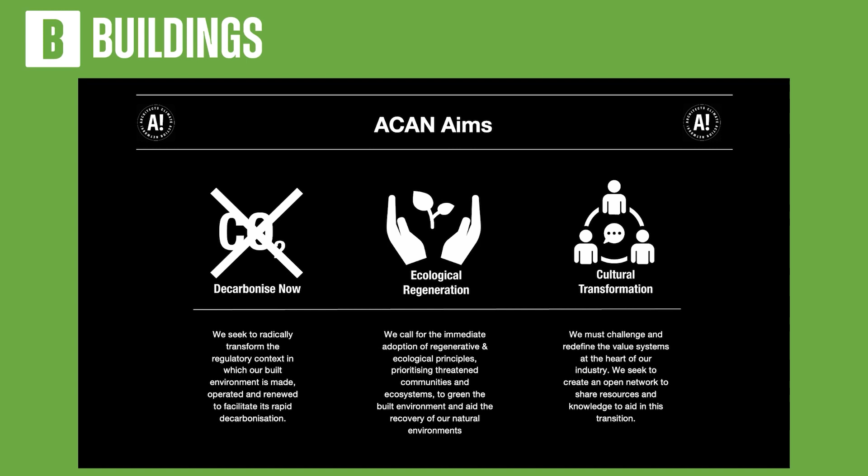Well, we've got two speakers today. Simon Sturgis is going to speak first. He's the founder of Targeting Zero, and he's a widely acknowledged expert in embodied carbon. He has advised lots of organisations, including RICS, RIBA, and the Greater London Authority.

And then we have Chris Procter, who is the director of Procter Architects, and he is the principal author of the Architects Climate Action Network Climate Emergency Conservation Area Toolkit, which he'll be talking about. So over to Chris.

Over to Simon. Wrong order. Well, you might get a more interesting slideshow if Chris went first.

Thank you. Right, this is called demolition, but I'm going to give a bit of an overview from where I've been coming from, and then I'm going to show you some case studies. So the first point I wanted to make, and there are various versions of this statistic, is that global construction is reckoned to be something like one new Greater London every 6 weeks. So that's a vast amount of construction. And apart from the resources issue, there's obviously a carbon issue.

The other point I would make, and I think this was in the blurb that was provided before this, is that about 10 to 15% of global emissions come from construction of buildings, which means that if you look at this diagram here, in terms of existential threats to humanity, construction at the moment is arguably worse than nuclear war, which is quite an out there thing possibly to suggest. But if that was to happen, it would happen in various places, whereas at the moment, carbon emissions and the impacts are everywhere. So, you know, there is a significant issue.

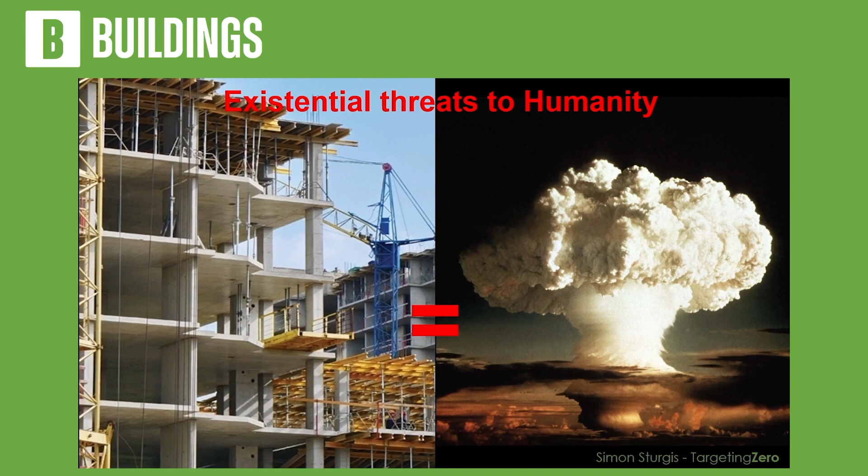So I'm quoting here Mark Carney, who used to be governor of the Bank of England, and he was also chair of the Financial Stability Board, and he said, we can't get to net zero by flipping a green switch. We need to rewire our entire economies. So this was the head money man, if you like, and he's not talking about fiddling around with BREEAM or anything like that. What he's talking about here is a major shift in how we do things.

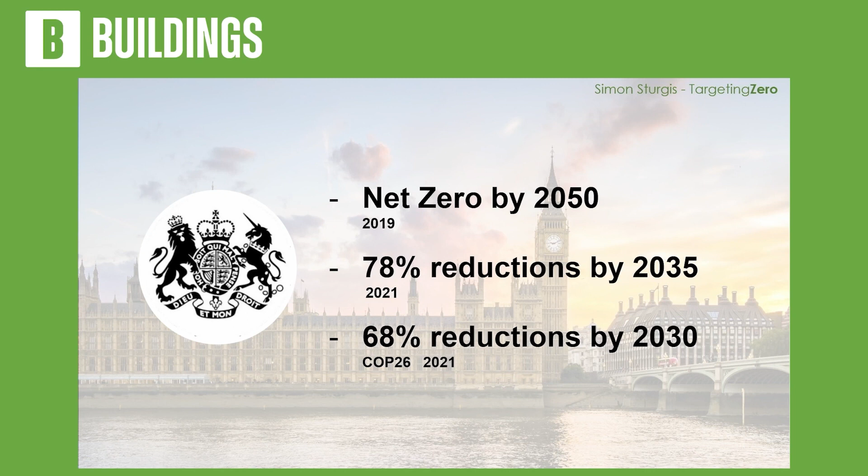What I'm showing you here is the government's current trajectory to net zero. At the top there, we've got net zero by 2050, legislation passed in 2019. And then we have 78% reductions by 2035 and 68% reductions by 2030. Now, if you put those all on a graph, that's what it looks like. So zero reductions up at the top left there, down to 100% reductions here. And the COP26 and the Act of Parliament, both in 2021, occur mysteriously absolutely on that line. So that is the trajectory we should be working to.

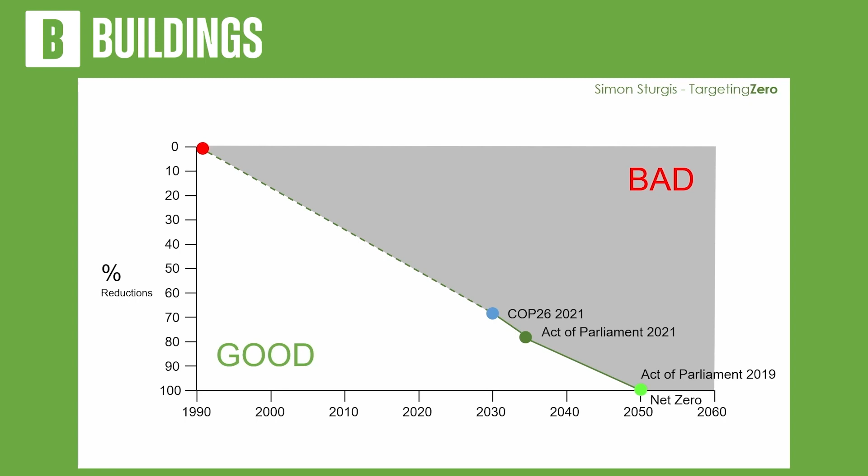And if you look at this a bit more closely, you can draw an arrow which drops down to where we are today. And what you find is that most new build happens above that line, and major retrofits and refurbishment, and of course low carbon new build, will occur below the line. The reason you've got a red bit here is because that represents a lick of paint approach to a building where you're basically throwing stuff away. You're not producing anything valuable. So that's more or less what a trajectory looks like.

And then what I put in that blue line there: if you are trying to do a cost-neutral new build, you will find that the supply chain will enable you to get down about 30-ish% without it costing your project more money. So that tends to be a limiting factor. But of course, we have to do better because we need to get down to this line. And certainly by 2025, we need to get down to something like 60% reductions in comparison to where we were in 1990.

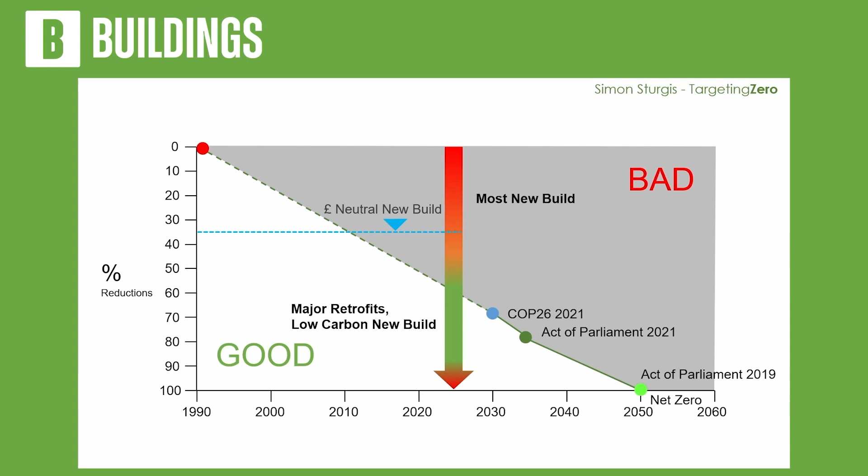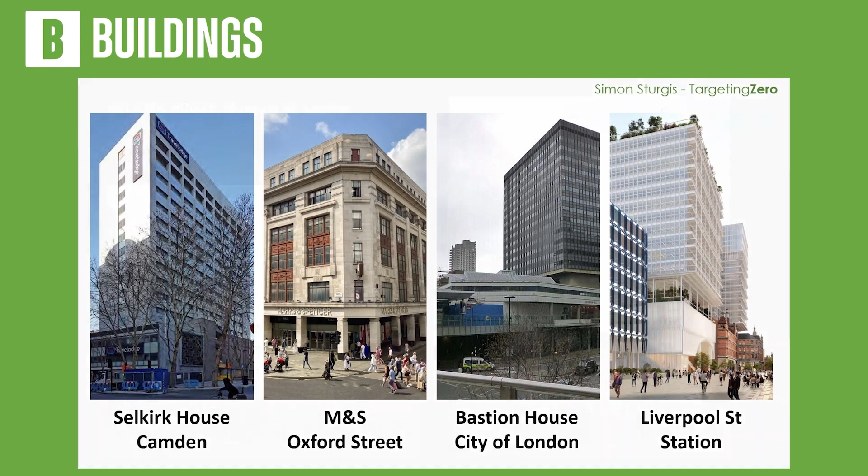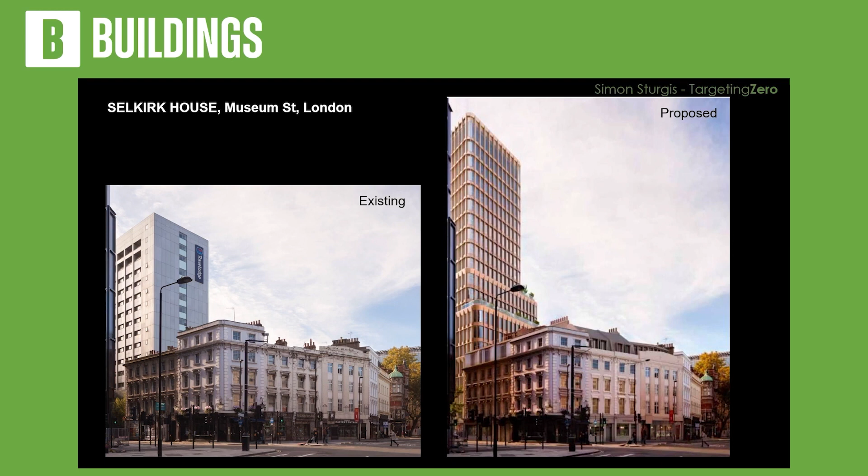So I'm just going to talk briefly about 4 different projects, all of which I've been involved with one way or the other. And the first of these is Selkirk House. And Selkirk House, on the left there, you've got the tower, which is a Travelodge and is what's there at the moment. And this scheme on the right here has now just been consented. And I'm going to say just a little bit about that.

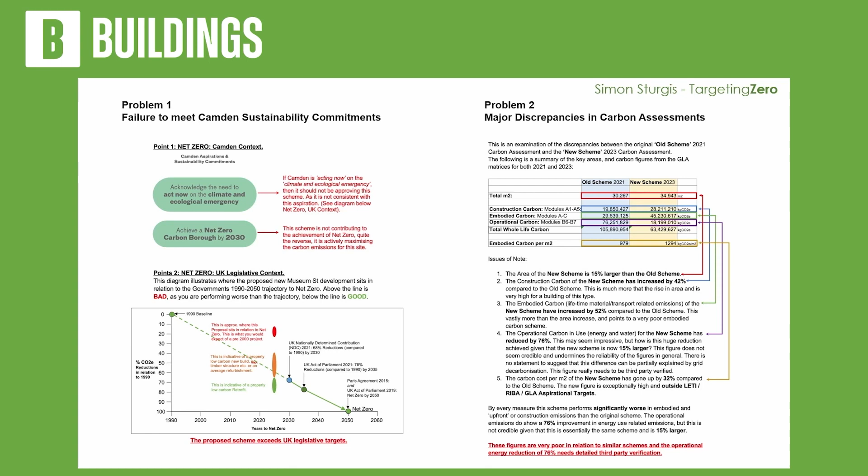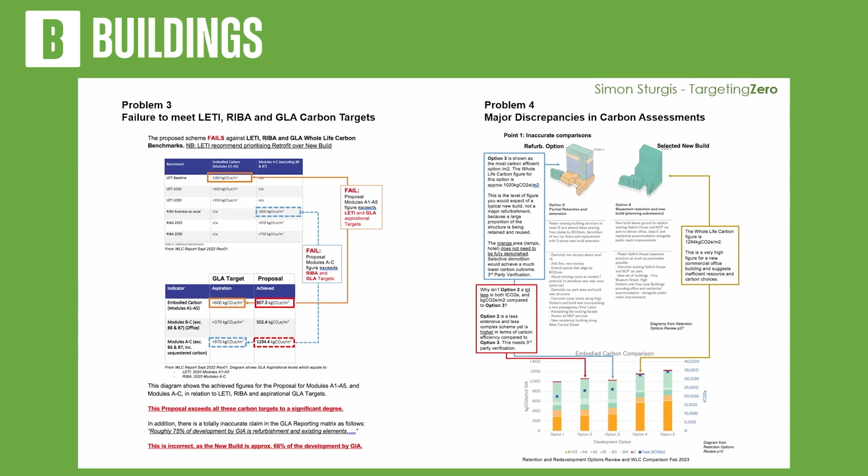There were also major discrepancies in their carbon assessments. So there were a lot of errors and mistakes, and optimism and what have you. There was also, in the submission, failure to meet all the obvious targets like LETI, RIBA, GLA, and so on. And other major discrepancies in comparing new build and retrofit. And there's other things to do with how they marked themselves, nonsense about floor-to-ceiling heights and so on, and they exaggerate all the problems.

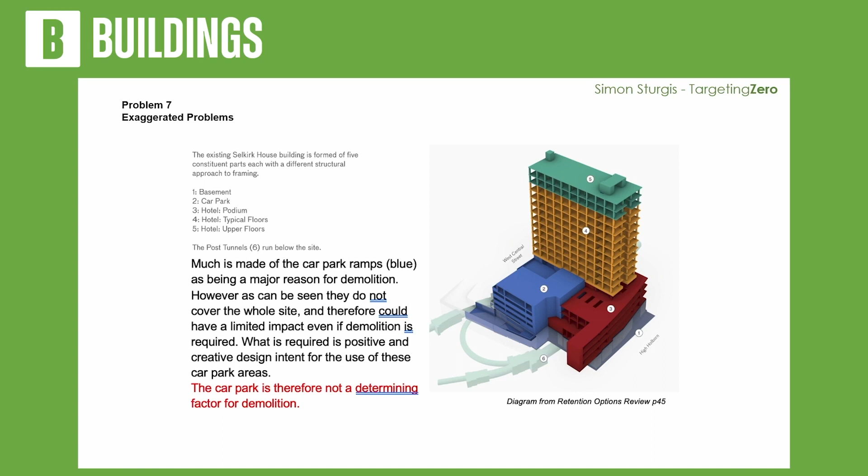And the point of all this is that Camden was so determined to approve this. What their motives were, I'm not sure, given that there is a massive excess of office space in London at the moment, and there's a massive shortage of housing. So you'd think somebody like Camden would add that up and work out that this is much better being used as residential or equivalent. But the point is that the planning system as it sits at the moment encourages you to look at retrofit, but it doesn't force it. So what happens is that people go through the motions and then say, oh, tragically, we can't make it work.

Now, we had exactly the same thing with Marks & Spencer in Oxford Street. And for those of you who've been following the news, you will know that the High Court has sent it back to the Secretary of State. So this doesn't mean at the moment that it's got consent, but it probably means that it will get consent. Actually, as it happens, we were surprised that we got as far as we did. We never thought the Secretary of State would rule in our favour initially.

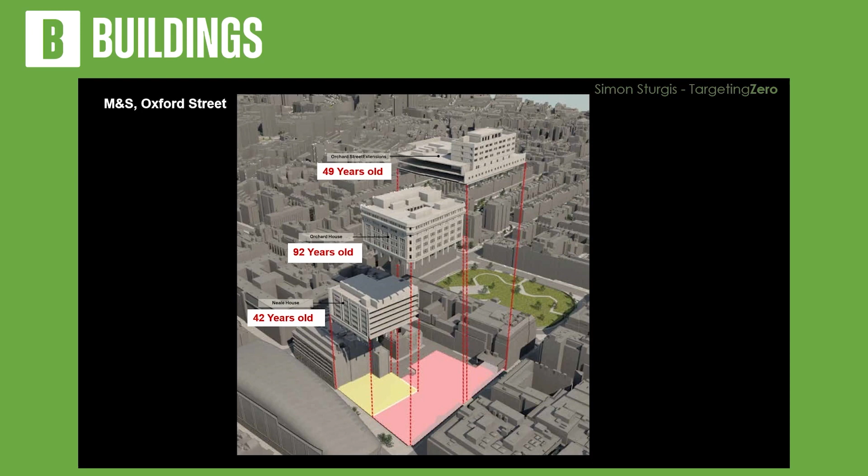But what you're talking about for the Marks & Spencer project is you've got 3 buildings. The one in the middle is the one that we're all familiar with, but the site includes one on either side, and there's a sort of low block at the back. And you'll see that 2 of these are less than 50 years old. And it seems incredible that we should be demolishing buildings of that age. And this happens on many occasions.

Now, the argument from Marks & Spencer was that they'd done 16 refurbishment studies. In fact, not one of those is actually a straightforward refurbishment. They're all, again, fiddling the books, if you like. And then they had what I'm calling here a lick of paint option, which, as I mentioned a bit earlier, was at the bottom of that arrow. So the lick of paint option is fundamentally inefficient. And what they did was they compared the lick of paint option with the new build. And of course, that quite clearly showed that a new build was great.

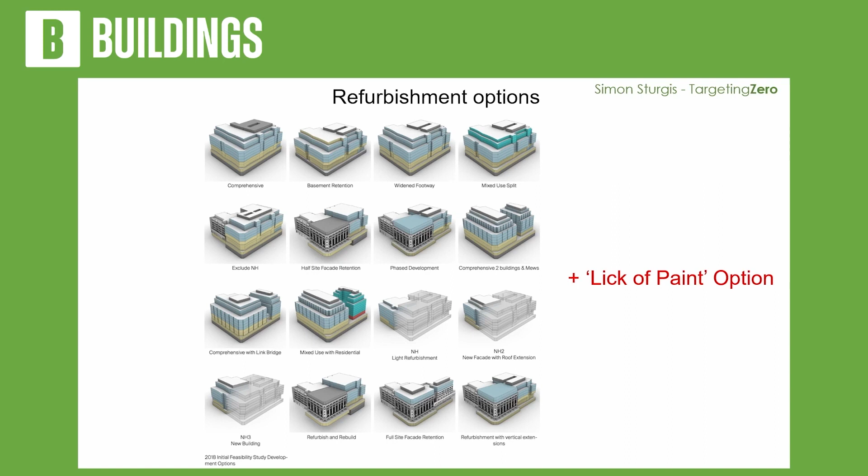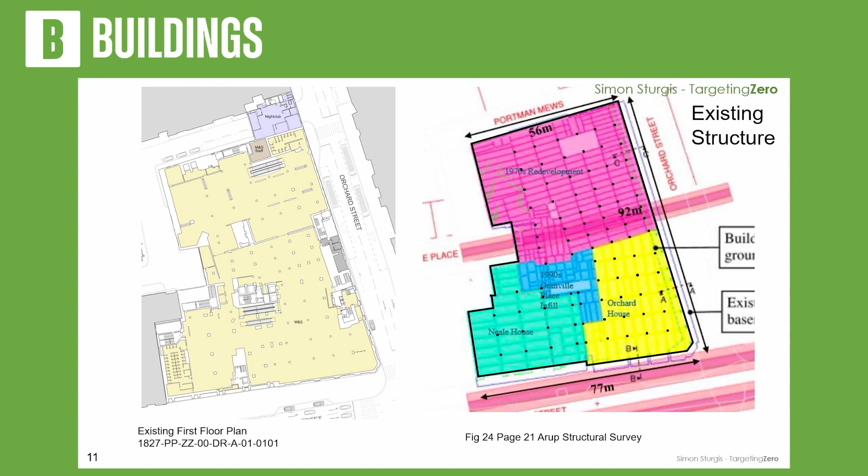The other thing that was interesting was that if you go inside the existing Marks & Spencer shop, it's chaotic in there. And you think, this is hopeless. Any agent would think it was hopeless. But actually, underneath it all is a very straightforward structure. And this is from Arup's structural survey. So underneath all this mayhem is a very simple thing. And if you stripped all that out you'd have a very clean, straightforward building that you could easily make work well.

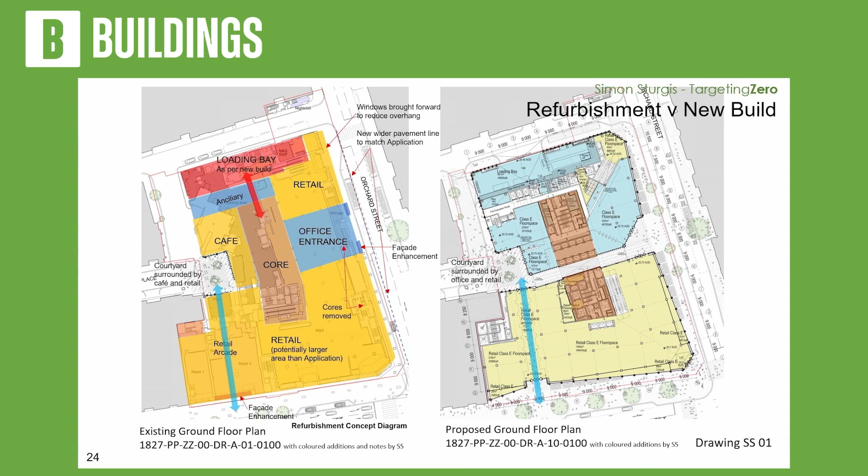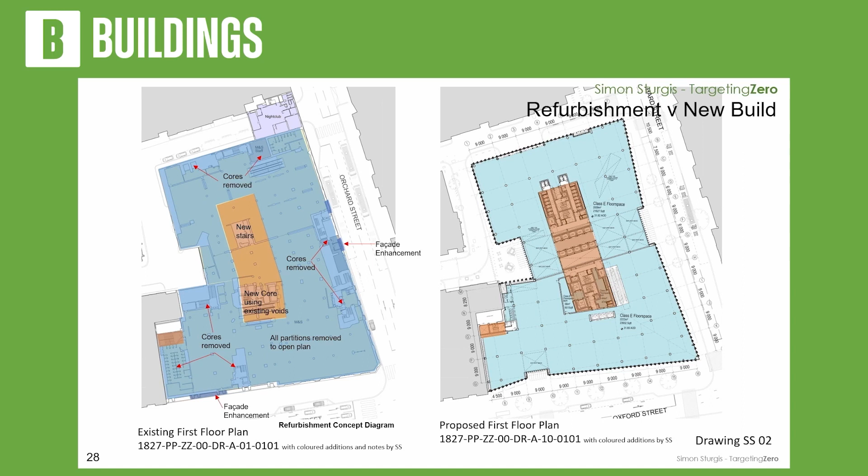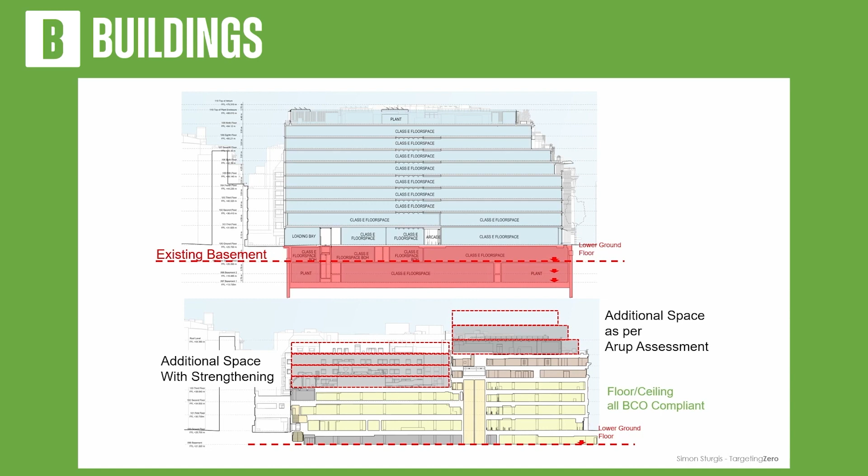So all round, the Marks and Spencer scheme was a kind of smoke and mirrors exercise, and they may well get consent for it. And I think what that means is that the National Planning Policy Framework, which determines these things, obviously needs fixing, because it does not align itself with the government's trajectory to net zero. So in other words, the government's produced this trajectory to net zero, but they haven't produced the teeth, if you like, to make it work.

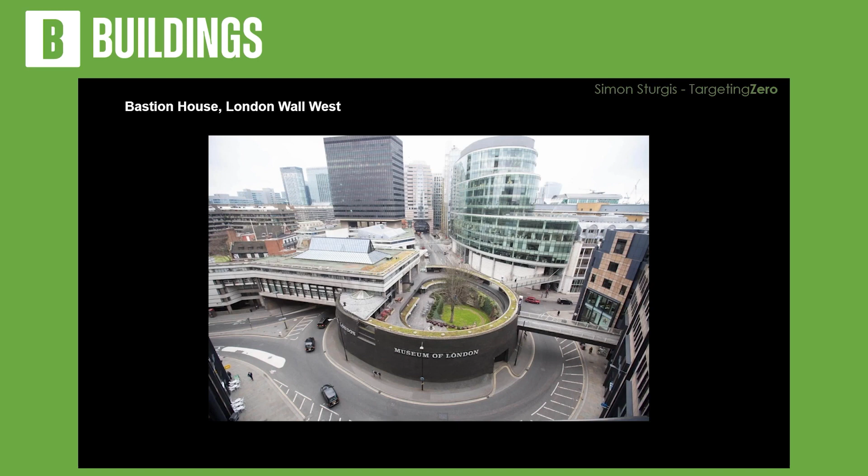So this one here is Bastion House, London Wall West, which has a similar sort of saga. I won't go through quite so much detail, but the architects looked at, as you see here, nine options. Now, the one in the red box, major refurbishment, they discounted as inefficient and hopeless. In fact, they'd done a parallel commercial exercise with developers, and they got three developers who all said they would do this scheme, the one that was discounted in the final analysis, and not only that, the developers produced the kind of money that the city was looking for.

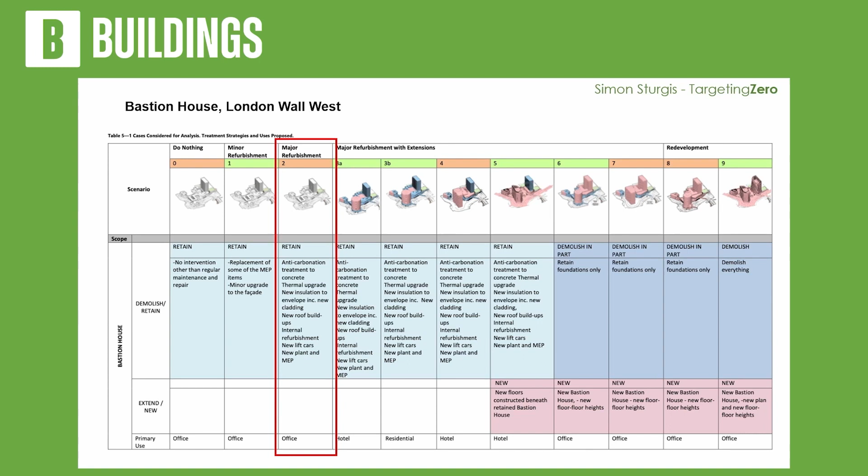So at the moment, it's going through the planning process, and I guess that if they get planning for a new build, they will discount this, because this is a poacher and gamekeeper thing. What's happening is the city is adjudicating the scheme that they are the landlord for. So make of that what you will.

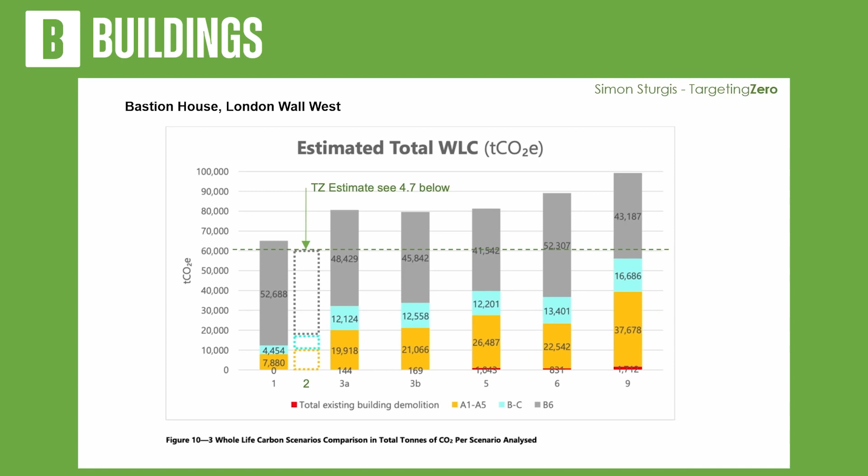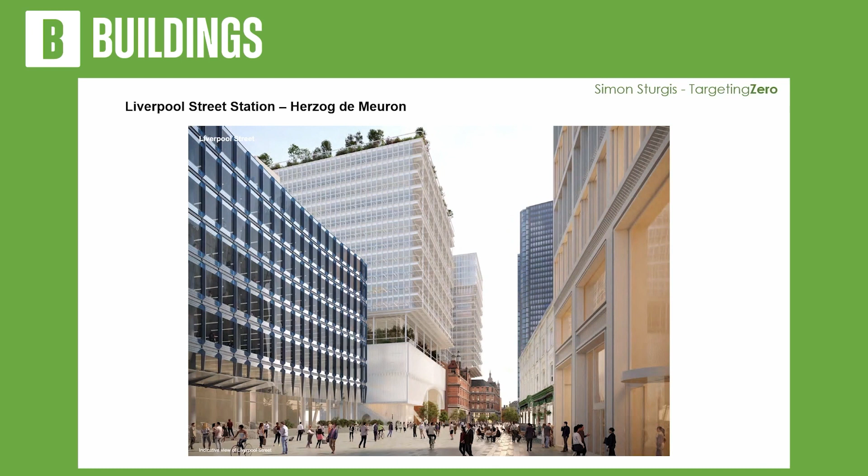The final one is Liverpool Street Station, Herzog de Meuron. This is Broadgate as you have it now, and this is the proposed scheme, these two buildings here. And it sits over Liverpool Street Station. You can see from this diagram, basically it drops in behind and on top of and through that. And it is a massive scheme. In fact, the carbon emissions associated with that are enormous. They're way out of scale with the GLA targets and so on.

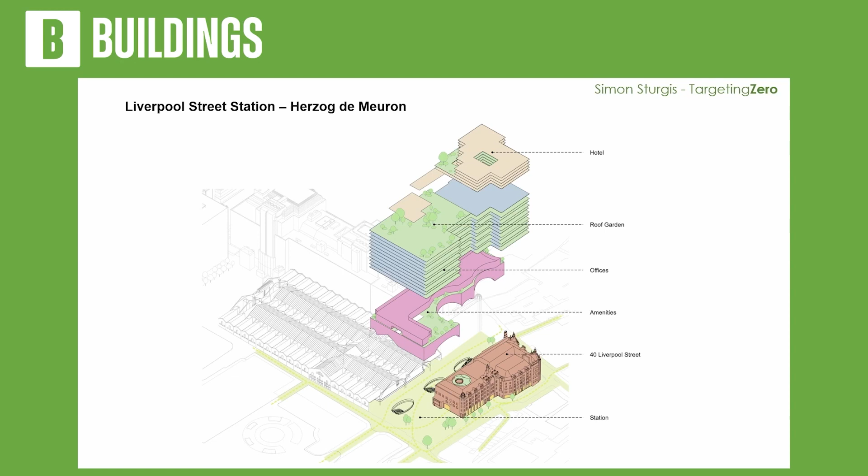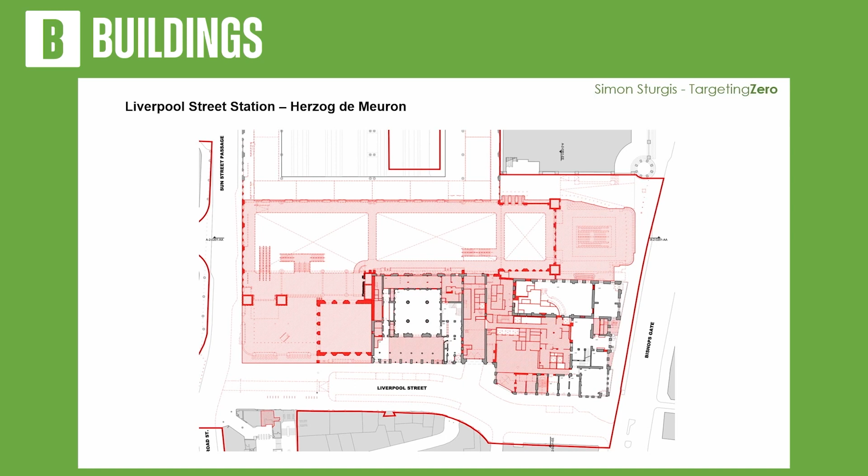And this is one of the submission diagrams. The red is what is going to be demolished, and the grey is what's being retained. So you can see that there's wholesale demolition of buildings that could be reused if they just rejigged the scheme a certain amount.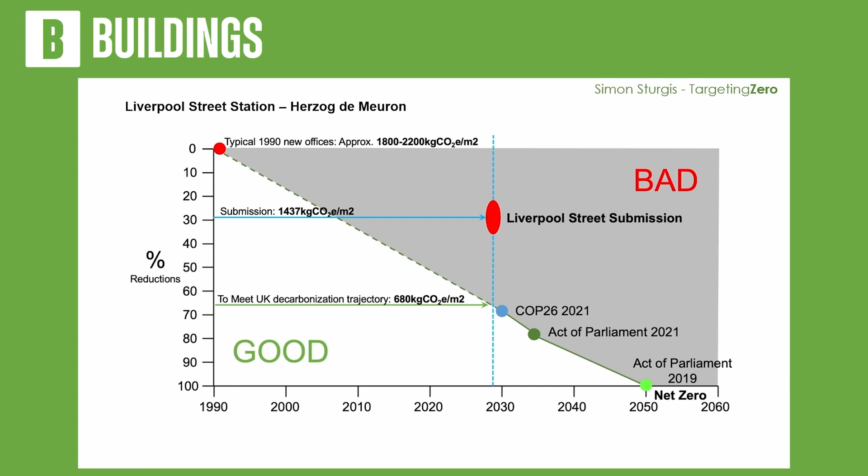Now, what I'm suggesting with this kind of an approach is that, in essence, we reuse as much as we possibly can, but allow ourselves to build higher based on what the urban infrastructure can take, rather than necessarily saying, well, we've got to respect the existing architecture. Now, this is where I sort of change direction from people like Save and so on. But again, I think you either keep existing basements, but you don't build new ones.

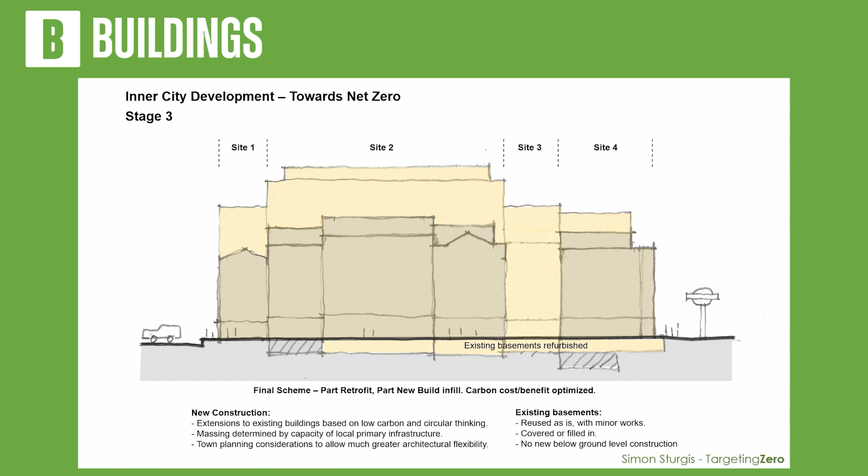Obviously, if it's a sort of grade 1 listed and it's superior, fantastic architecture, we should take maybe a slightly more reticent approach. But I think for a lot of buildings, the interest and excitement could well be architecturally in the overlap of these different types of architecture. Thank you very much.

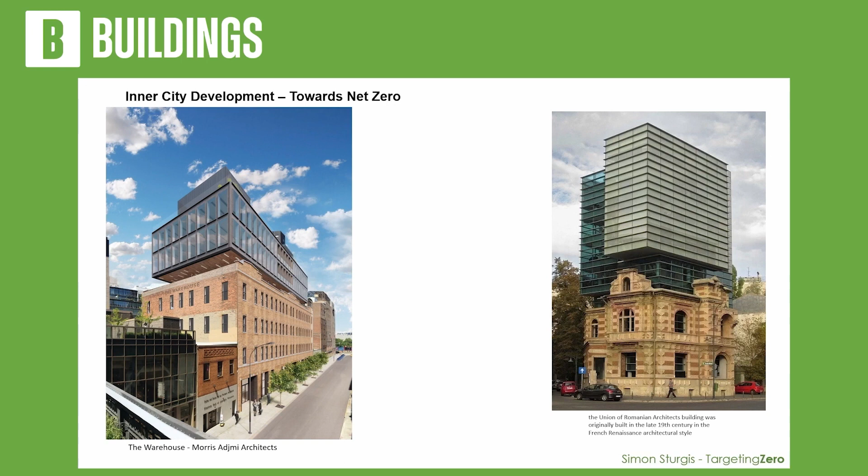Thank you very much, Simon. Over to you, Chris.

Right. I'm the author of the Climate Emergency Conservation Area Toolkit. It's a bit of a mouthful, but it's clear what it's about. And you probably have seen it because we launched it last year here at EcoBuild, the print copy, and it's downloadable as a PDF on the website. But there's still a few hard copies left, and RIBA is selling it. We had some at the stand, but you can go to RIBA. You can also email directly to me, and we can send out the few that we have. But it's a PDF downloadable.

So it was this idea to research one particular conservation area and see what numbers came up, see what was interesting about it. And I found that there's a lot of things that the planners could learn about. And if we look at what the challenge is, we've got a massive challenge to 2050. And what do we have to do to achieve that? We have to go combustion free. We have to not burn anything. We have to stop burning. So that's first. And we also have to reduce our energy demand. Heat pumps alone will not achieve what we need to do.

And LETI has suggested that we need to do a 62% reduction of space heating. This is for homes. Most of my focus now is on homes, which is 20% of our carbon in the UK. So LETI has suggested that the existing area of our existing stock is here, and we have to shift this wholesale back to here. So it's a big change. And we also have to electrify, which is the no burning.

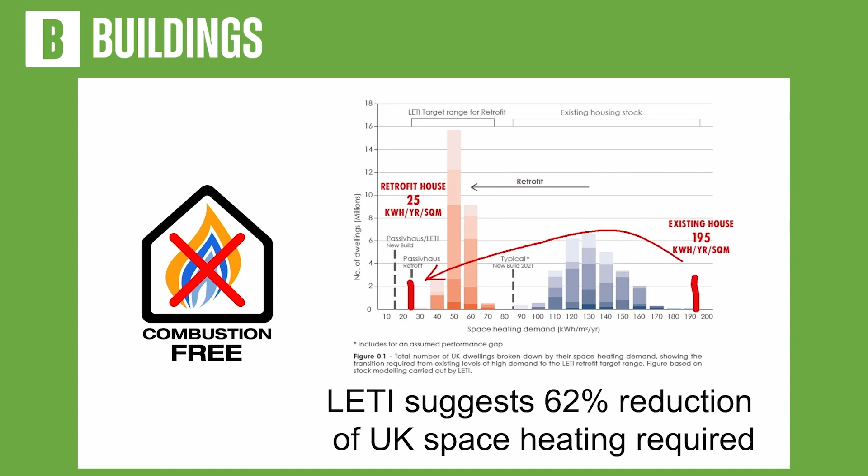This was a particular project that I did in my office, looking at a very leaky old house in a conservation area, and using retrofit and Passive House, it could come down to this level. And this is a non-listed house, and I took certain stances with it. I was able to use some Passive House ideas I'll show you later. But this is a house that was out of the ordinary. So it's that kind of move that we need to do.

So what I'm proposing is Retrofit 2.0, which I'm drawing from the experience we've had with retrofit to date. It's slowly moving and gradually adjusting, and Historic England is gradually moving their position, allowing slimline double glazing maybe, but they're not realizing that there's vacuum glazing, there's all these other things coming. And we have to radically think, to get that big shift, to move that far, we need a new way of thinking about retrofit.

And so with retrofit, you think about all the components of a building to retrofit. In the guide, I looked at the components in terms of heritage. But today, I'm just talking about 4 things that I think stand out. And I think extensions can be retrofit. Most people do not think extensions are retrofit. They think when you retrofit your house, you're insulating your house. But extensions actually can pay for the retrofit. Retrofit's so expensive. Why can't we use the additional space to offset the upgrade to the old fabric?

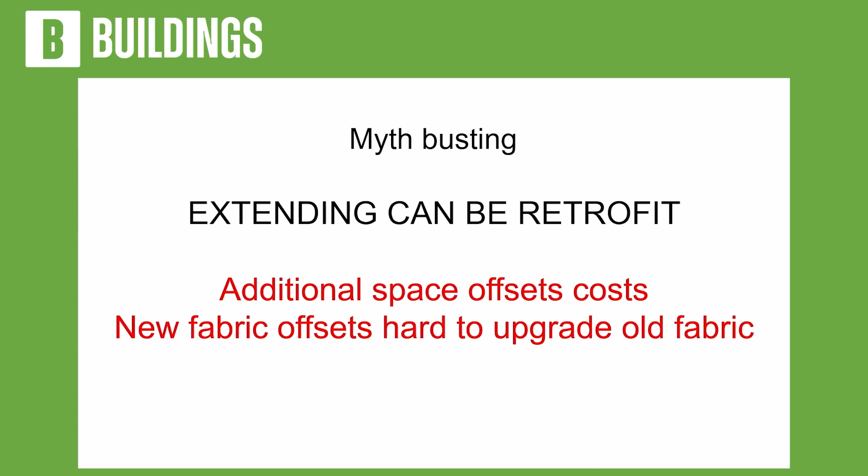And I think this is a really important lesson that people need to think about. And I'm going to illustrate it in a few different ways. One is the low carbon extension is the roof. That can be timber. We don't need steel up there. It's got a foundation. It's got the house below it.

So a lot of terrace houses may have bad roofs or may have flat roofs. You can extend it quite easily. And of course, obviously basements are the worst, as Simon was mentioning. Rear extensions are in between because the carbon cost is in the foundation for these things. And this could be timber and low energy, but the cost is in the foundation. Maybe there's a way to do the foundation a little differently.

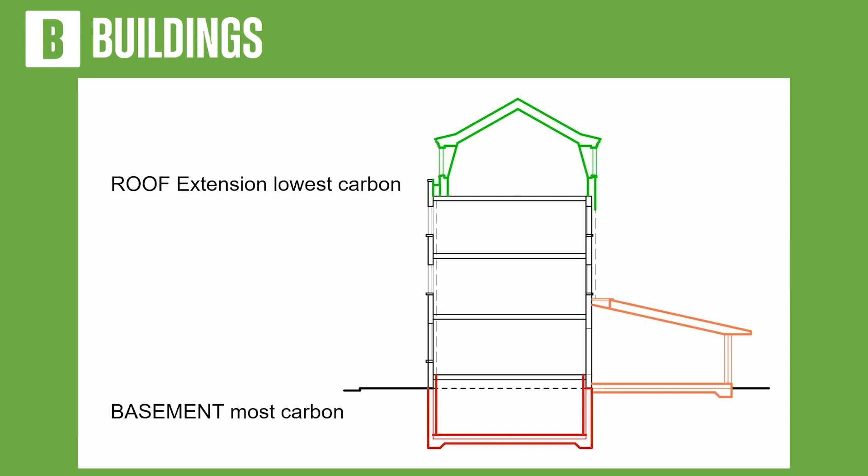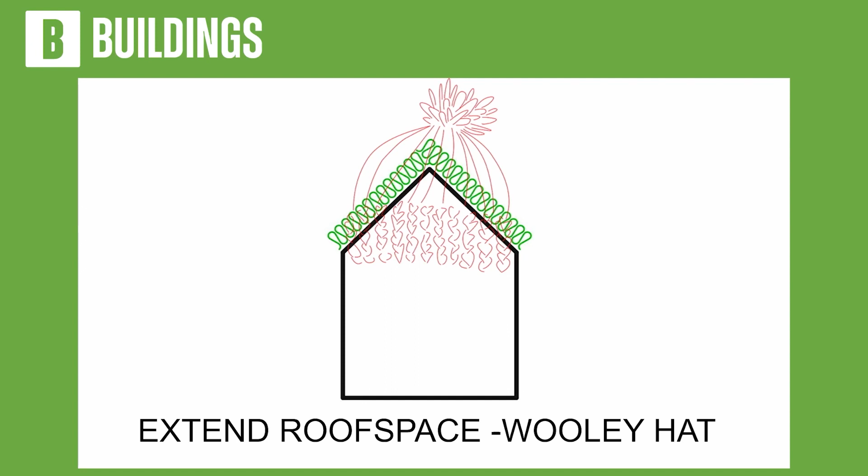But if we look at this, then a priority could be roofs and roof extensions in terms of carbon saving. And what this does is this puts a woolly hat on top of your building. I'll get to that. Well, let's see. So what we're doing with roof extensions is we are capping the building where the heat loss is the most, as heat going out the top. We can cap it with state-of-the-art new construction technology, meeting building regs or surpassing building regs at the roof level. And that gives great benefit for the rest of the building.

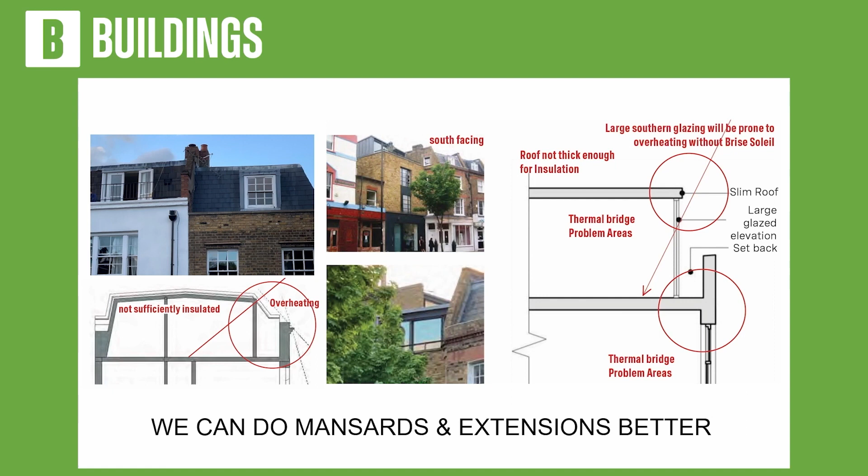The insulation in the roof is the most important. We need to allow space to insulate the roof. And I would suggest 300 mil. And most people are so concerned with height restrictions in planning areas that they're making very low ceiling heights in these attic rooms and making very low space for the insulation. So you only have to resort to high performance plastic insulation to achieve anything. We should be more tolerant for insulation and height. We should change the height.

So if we look in detail, there are other ways to do things. If we have a cold roof, we have a lot of space in here to really fill in lots of insulation. And you can put cellulose fill or fiberglass. You could really overdo it. And there are certain levels of building regs that I put here. This is in the guide as an idea to think about. Planners need to understand the layer of wrapping of the roof. And they need to understand, we all should start thinking, how do we wrap a roof to the walls?

On heritage or on many buildings, the front facade is the beautiful thing you want to retain. The front facade, you wouldn't touch. You'd insulate inside the space. But on the rear, you can in many cases insulate the wall on the rear as external wall insulation. So if you're doing that, you don't want to set back and have a parapet. You want to cover the parapet. So we need to think that we wrap the insulation from the inside up and around to the outside. And this has to be part of the thinking about extensions, that we can protect and wrap this rear wall.

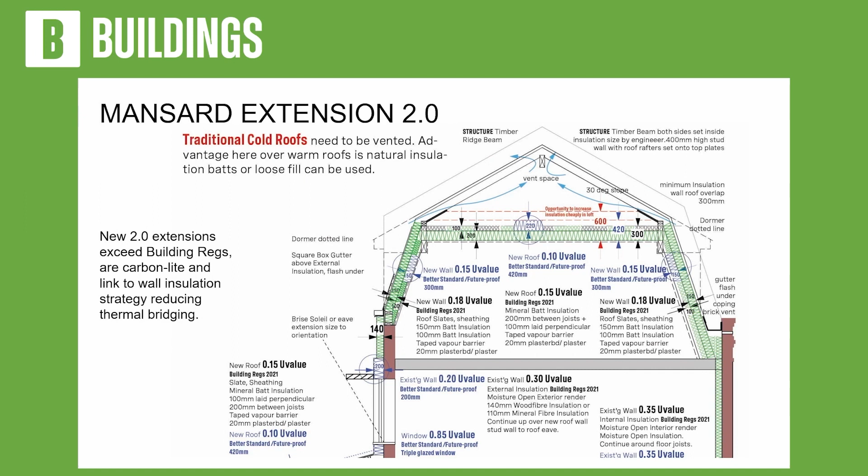So conversely, with a modern kind of extension, where you might have a bit of a terrace behind a parapet or something, these are just scheme ideas. But you might think you want a delicate and modern detail of a very thin roof, but then you allow space to taper back and make space for the insulation. That has to be done.

And then you think of how you wrap and connect it to any future internal insulation. Because you may do this without doing some of the other elements. You may not do the wall insulation, but you might in the future. So you think, how can this connect? And at the back, how does this connect on the outside? And it's because we have public realm and we have private realm. And in planning, a lot of emphasis is on the public realm.

That has to meet the community and the heritage standards. But the private realm is more flexible. And I'm not talking about listed buildings. I'm talking about conservation area buildings that are more generic. And there's scope to do things in the back.

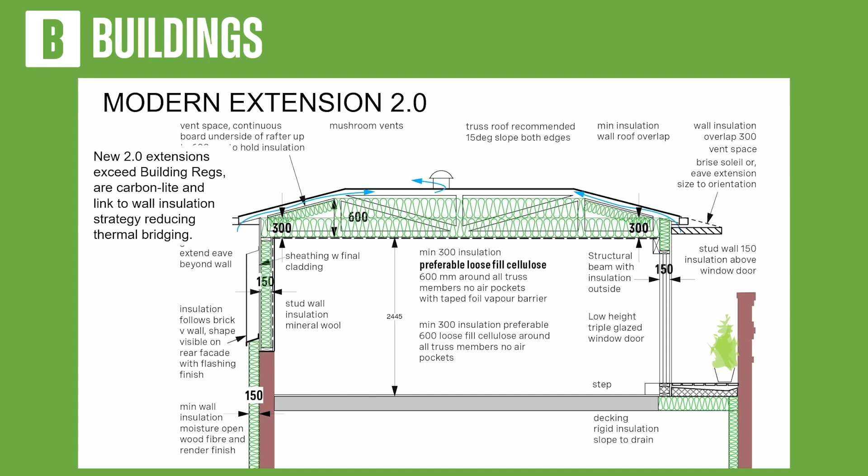Okay, another form of extension is a rear extension. Now, why put the insulation against the mass wall? So you're spending a lot of money to insulate the house, and you're covering up perhaps beautiful brickwork. Why not pull it away and use that internal space as additional space and keep the brickwork inside your house, the mass inside your house, and beautiful brickwork on the back? Why put it here? Why not just move it out and use this space? And this can pay for the upgrade.

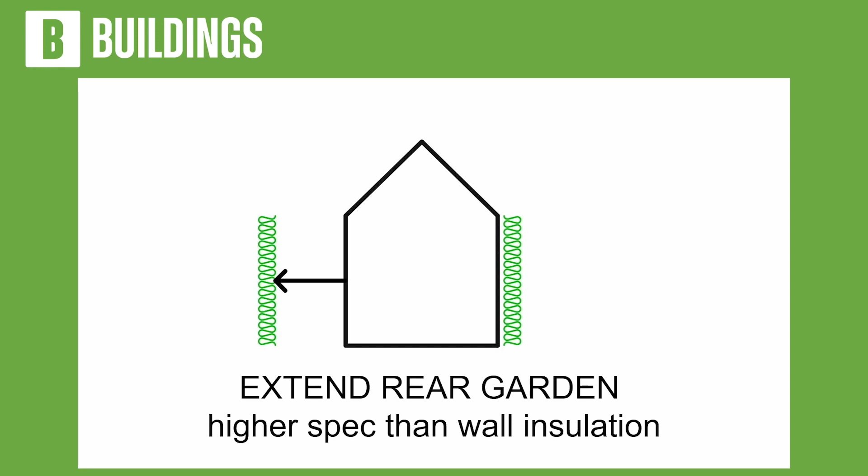So we need to think, if we're extending out the back, how we're doing it in terms of form factor. We're creating this new kind of wrapped area. We don't want to have lots of surface volume and surface area. We have to think the efficiency of cozying up to your neighbor, especially with terraces. And you get a lot of these extensions. Maybe some of them are original, some of them have been added. But if you're going to add new extensions, share the party walls. Build it to fit within the party walls so that you have the least surface area. And this is quite important form factor: rather than extend it too far out, share the wall.

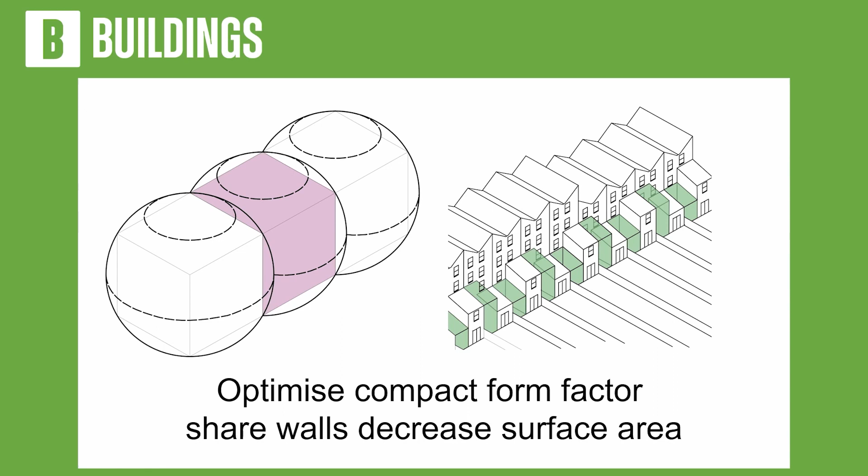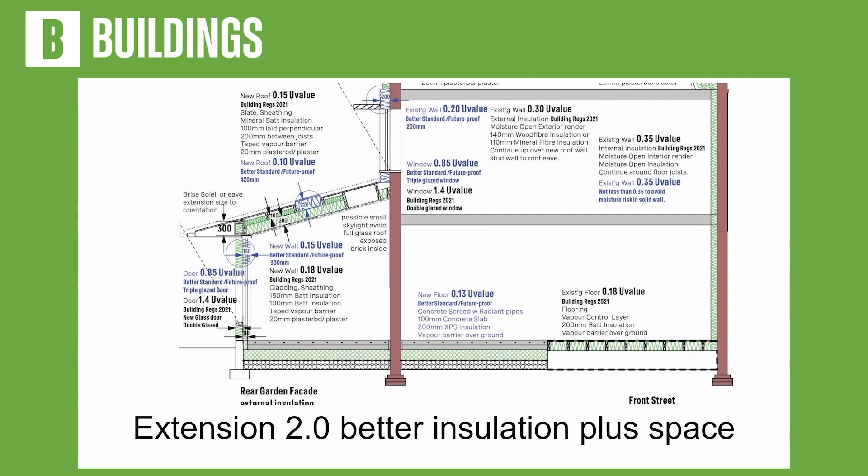So you might do something like this. You have a rear extension and you expose the brickwork as part of the space, and you've done it to the highest standard, and you may have underfloor heating. This was an option inside a historic house if you take this out or you keep the existing floor. There are different ways to do this, but the idea is to keep this space with wrapping and the mass is inside and not a lot of glazing. If this is south, you have to think how you're shading and not doing a glass box, because that defeats the purpose of the retrofit.

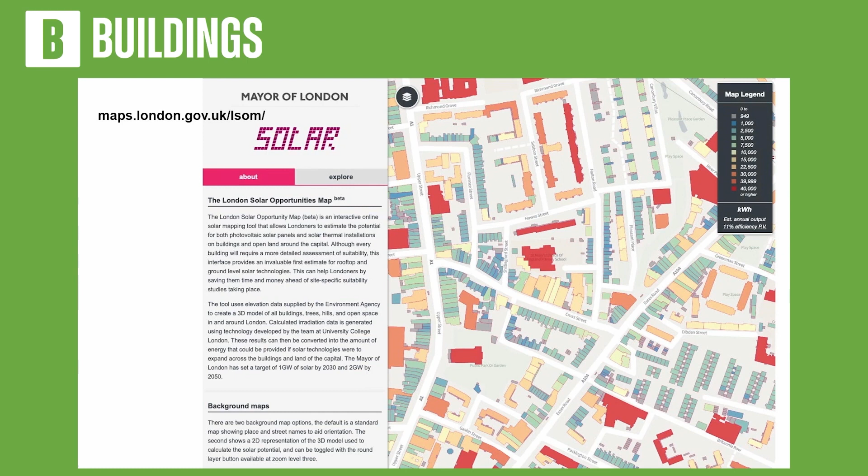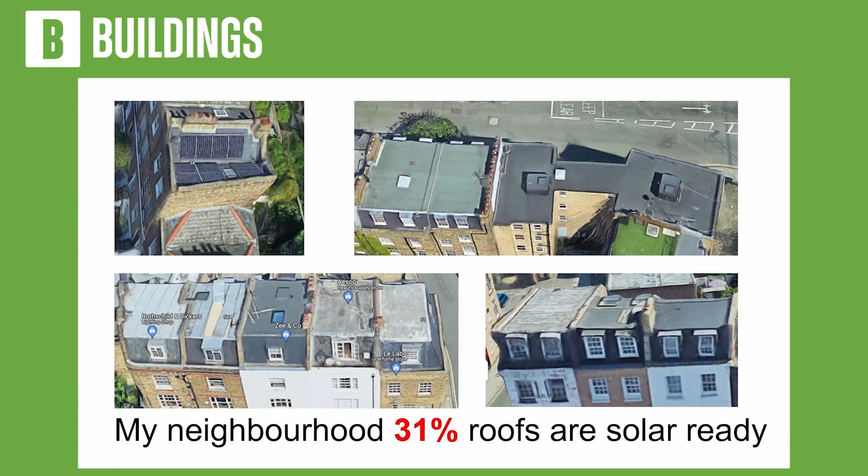And if you look at London, we have a solar map. We have data that shows every rooftop in London, through the mayor's maps, London government, and it shows the amount of generation on particular roofs. So we have resources there that'll help us. In my neighborhood, 31% of the roofs are solar ready. This is a heritage area, conservation area, but a lot of the roofs have a flat at the top, flat extended mansards, other flat roofs. And there are some London roofs, butterfly roofs, where you can easily put solar hidden within the roof. So we found through counting and looking down with Google Maps, 31% is already there. It's available to use. You don't have to do anything to change the architecture.

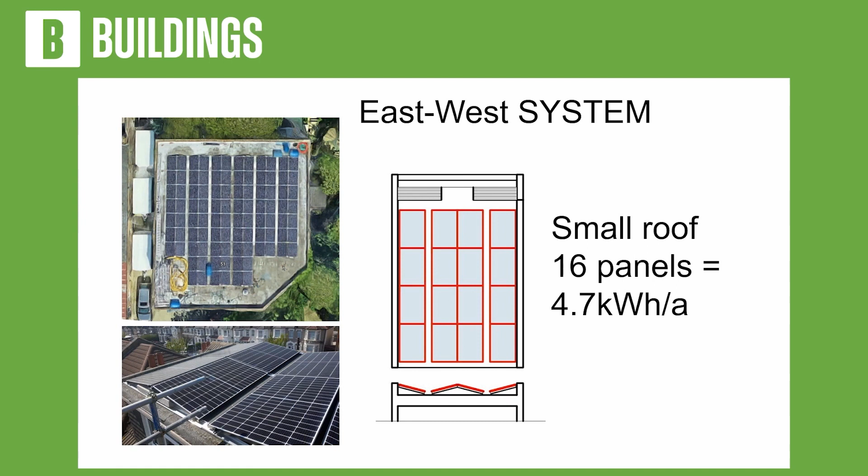This is Greenpeace, and it's near us, and it's completely covered with east-west. So north and south are top and bottom. And it is very efficient because of where we are in London. This is the sun path in London: the red is summer, the blue is winter, and spring and autumn are in between. And if you look at the summer, the sun is really coming from the northeast and setting in the northwest.

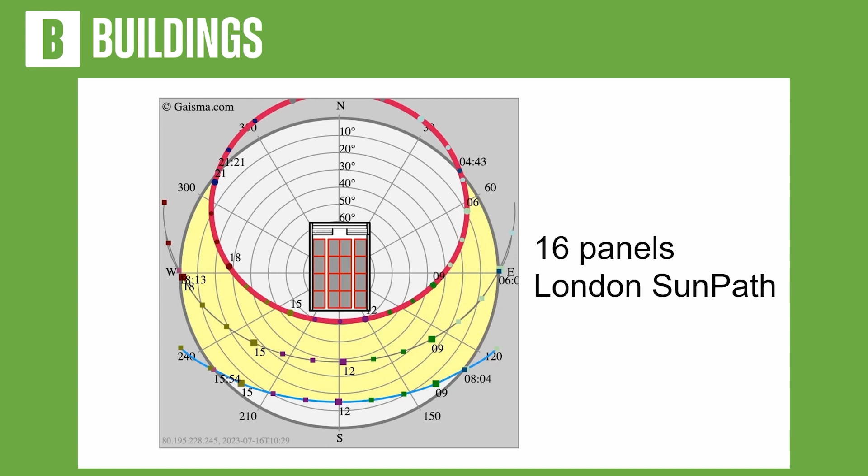There's a large scope out here where a panel traditionally set this way wouldn't get any sun on it. So east-west sounds counterintuitive, but actually, depending on where you are on the planet, there can be generation from the morning sun or afternoon sun. It does lose in the winter. That's the drawback on this. But it gets you more panels on the roof. So you have to think of the cumulative. You might generate less, but you do quite a bit.

You do quite well. Liz, can I ask you to speed up so we can get some questions? Yeah. All right. So just a few more slides.

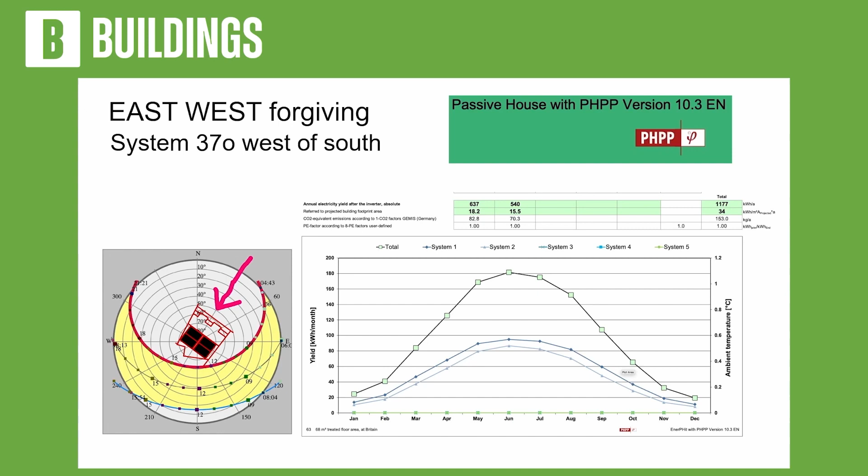So this is a particular study of a particular roof that was oriented 37 degrees west of south, and even doing that, it didn't make much difference between the different panels. Mechanicals light, this is the last thing. I think we overemphasize heat pumps, these big, massive heat pumps that get 7,500 pounds. There are actually 8 types of heat pumps. There's not just the 2, ground source and air source.

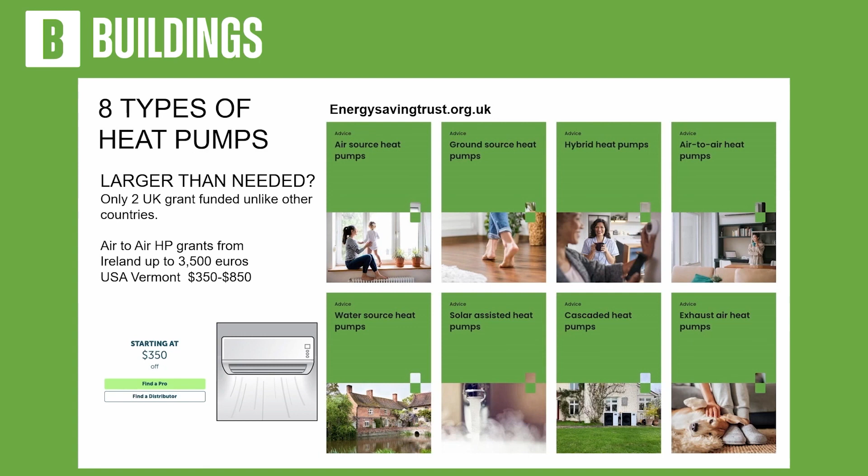There are other types. And the one that I like is the air conditioning, which is 75-year-old technology from Japan. And it's cheap. It's around. And some countries, Ireland, will give you a grant for one of those up to 3,500 euros. USA and Vermont will give a direct grant, 350 to 850. There are grants available. Here we don't have that.

So just to look at mechanicals light, this is a proposal for a flat, and there's a roof extension, high spec. There's external insulation on the back, in the front. So there are simple systems. There's the condenser exterior unit here, and then there are 3 internal delivery units, 1 per room, and you can go up to 5. And this is very inexpensive to put in. You can heat this if you've insulated. And then a very small mechanical ventilation heat recovery system here with an easy source of pipes.

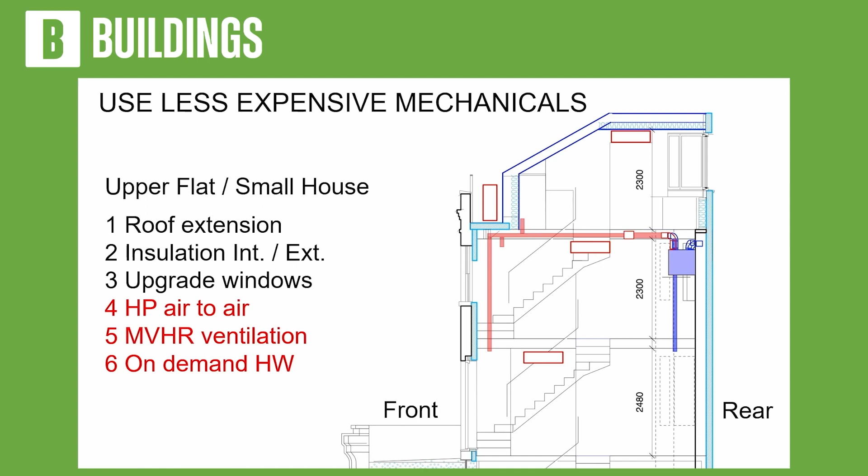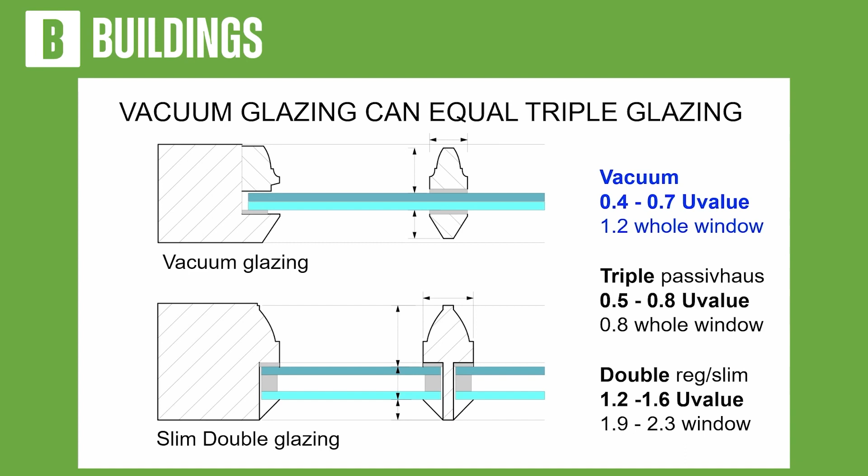So vacuum glazing, last one is windows. Vacuum glazing is the next big thing. A vacuum glazing can be similar to triple glazing, rather than this emphasis on double glazing and slimline double glazing. And this is the last slide. There are 3 generations of vacuum glass. The first one was the Japanese Pilkington after research in Australia, and this was the main one, Spacia.

But now we've got currently in the market in the UK a Belgian glass and a Chinese glass, and they have pros and cons. But there are 3 more Chinese companies developing vacuum glass, and they're bringing the price down. So this vacuum glazing is going to be something that we have to think about. It is coming, and it can be more efficient, and the price will come down. Right now, it is a bit expensive.

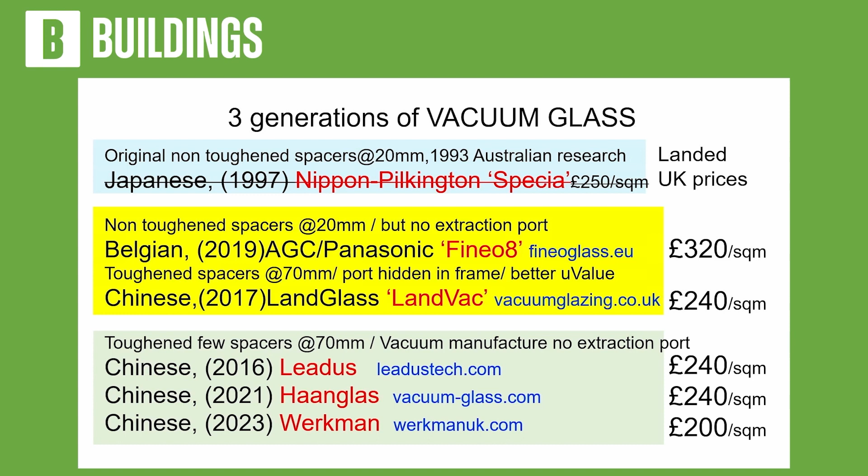Yeah. Thanks very much, Chris. Sorry to rush you. We've got a very short time for a few questions.

I'm a surveyor, so I look at existing buildings, sometimes listed, mainly not. The Party Wall etc. Act came in 95, 96. I have a house in Lambeth, inner London, LCC, so it was under the London Building Acts, and my neighbours on either side have built extensions to the rear and avoided doing a party wall thing. I couldn't enforce it. Ergo, when I sell it and someone wants to extend, there's going to be a gap, which is going to be a nightmare to maintain, and you've got heat loss.

Can someone lobby the government so you can enforce it? The Party Wall Act needs rewriting, in my opinion, from a surveyor point of view, because then you would save heat loss, and also maintenance is a nightmare. That is a real problem, and the builders avoided doing that. I said, well, we could agree, but I couldn't enforce it. Is there anything we can do about that?